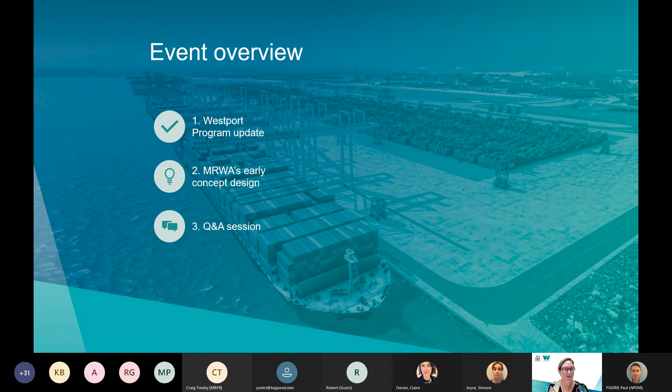Thanks very much, Miranda, and thanks everyone for joining us for this evening's session. Can I also just say, particularly to the landowners that have joined us this evening, that I appreciate the announcement the other day may have caused some concern and surprise, and I recognise that would be a stressful situation for you. I really hope today we can go through some of the background information around Westport as to why this decision has been made.

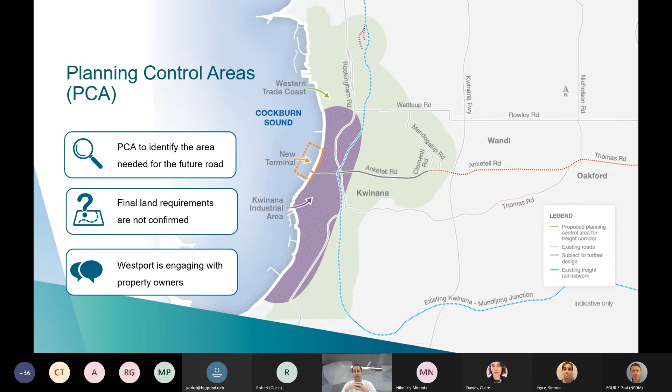So the planning control areas are out there while we finalise the land, and this allows us to speak and engage with property owners and other people interested in this space.

The next step for this development: the announcement was made a couple of weeks ago in terms of the early road concept design shared with the community of landowners. This wasn't released prior to that announcement at all. We worked really quickly to try and get something done as soon as possible and get it out to the community rather than hold on to it, and we've got that out as soon as we possibly can.

After consultation through this process, Miranda is speaking to many of you and others. After we've had the opportunity to talk to you about this, the road design, and what the implications and opportunities are for you, in the middle of 2022 is when we expect the planning control areas to be implemented, and that's when we'll actually see decisions made that limit the ability to change development in those locations.

Between mid-2022 and the end of 2023 is the time we'll be designing and refining the design. This will follow community engagement, but also substantial work yet to be done around how many trucks and how big the road actually needs to be, depending on how many containers travel by road versus rail, and how big the port needs to be. It will also be heavily influenced by environmental and cultural studies, which haven't been undertaken at this point.

We have some initial environmental studies which allowed us to position the road, but there'll be more detailed work done as the design progresses, and obviously the cultural studies as well. We have a cultural advisory group of elders and leaders from the area who were elected by Aboriginal people in this area, and they've been very clear with us about the need to do proper cultural studies along the corridor to identify any areas we might need to avoid or accommodate.

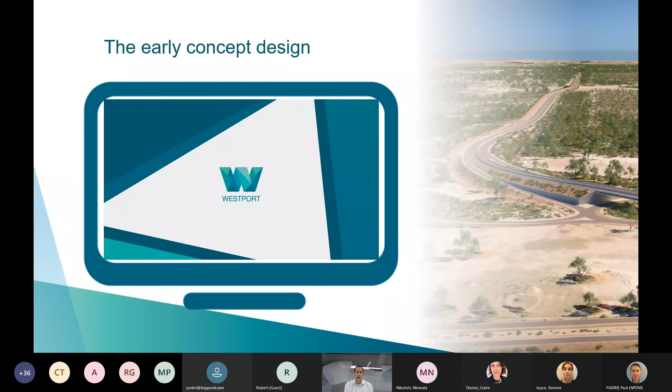What I'm going to do now is ask Simone to run a visualization of the road, and then after that, Paul Fourie from Main Roads, who's been the lead on the design and modelling of this road, is going to take you through the design in somewhat detail, and then we'll come back to questions. Thanks, Simone.

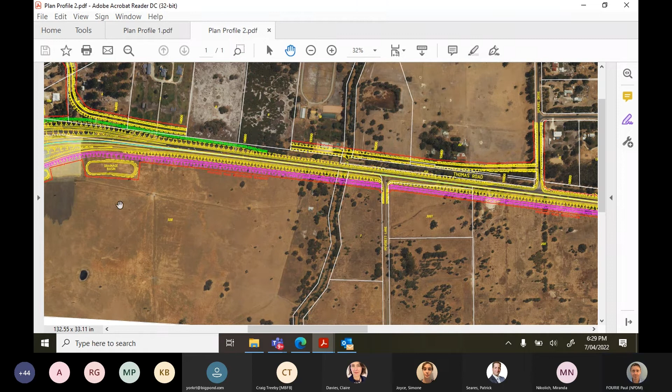Moving further west. Now this was quite a complex location because we've got Nicholson Road to the north and Nicholson Road to the south. We also have Thomas Road to the east, Anketell Road to the west, and then Thomas Road to the south here. So the best way of dealing with this, because we want to provide free flow movement for freight traffic and general traffic through these intersections.

What we've provided here is two grade separated roundabouts. This is a roundabout, a very large roundabout, with a diameter of around 70 meters, at grade. And that's a roundabout at grade as well. The freight route runs free flow over these two roundabouts.

And then the roundabouts with these little service roads on either side provide for all movements. So you can come along the freight route, take the off ramp, go through the roundabout, pass under the freight route, and then travel to the north, and so forth. All movements are allowed for at this grade separation, but it is quite complex.

Again, these round areas here are future drainage basins to catch all the flow, all the runoff from this future grade separation. And you can see here our principal shared path running on the southern side of the road. Thomas Road in future will be upgraded to a 4-lane divided standard, continuing to the south here.

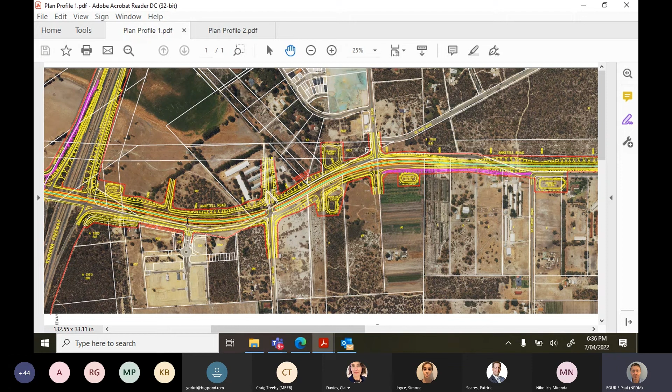So this is fairly complex, and unfortunately, as a result, the footprint is fairly large through this area. But we had to provide access as per the structure plans, which we've done, while also continuing to provide a free flow freight route for all the container trucks and other freight traffic. So these will be two freight-only lanes for container trucks from the future port, but also for other heavy vehicles. So moving further to the west.

In order to achieve that, we have to provide a 3-level grade separation at this location. So we have Kwinana Freeway and the rail at the lower level. Then we have Anketell Road, westbound, which will use the existing bridge, and eastbound, which will use a new bridge constructed to the north at the next level, at the existing Anketell Road level. Then we'll have the freight route, two lanes per direction, running at a third level over here, which allows vehicles coming off Kwinana Freeway to turn right on Anketell Road. They'd only be able to do that if this were at a third level, because they will turn right underneath this freight route. So maybe I can just pan down here.

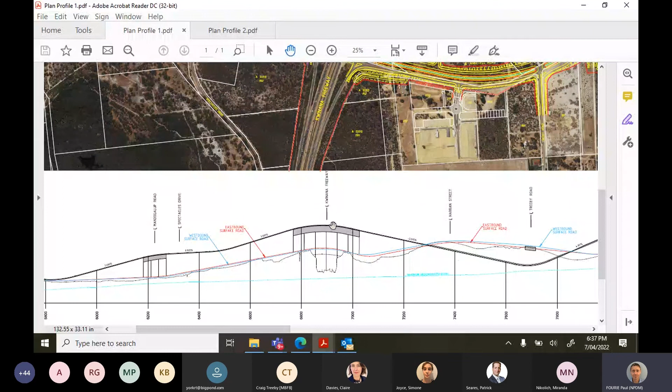There's a profile that shows this as well, and when you ask questions, I can show this as well. That's existing Kwinana Freeway and the rail at that level. This is existing Anketell Road at that level, and then the freight route passes under Treeby Road and then climbs and passes over Kwinana Freeway at a third level, and then it continues. It passes over Mandogalup Road and then back down to ground level at this location.

That arrangement continues with the freight route in the central median, two two-lane surface roads, one westbound and one eastbound, through the Mandogalup intersection. This is also grade separated, providing all movements into Mandogalup, but allowing the freight traffic from the port and all other heavy vehicles to proceed free flow through this area, and then rejoining the 4-lane divided freight route at this location.

What we haven't shown here, unfortunately, I'm sorry, is the principal shared path, but that continues through here. So we'll have shared paths on both sides because this is an urban area, continuing on the northern side through this area.

There is very, very slight impact to the Spectacles. In fact, there was impact because there's an existing planning control area over this area, so there would have been impact anyway. We're just working on the design to try to minimize that impact as much as possible.

As Patrick has said, this is really a very preliminary design. The purpose of this session is just to inform you exactly what this design looks like, and we welcome all your comment. I'll hand over to Miranda now, and then she'll start the Q&A session. We welcome all your comment, and we'll try to incorporate your comment to the best of our ability where possible into the design in future.

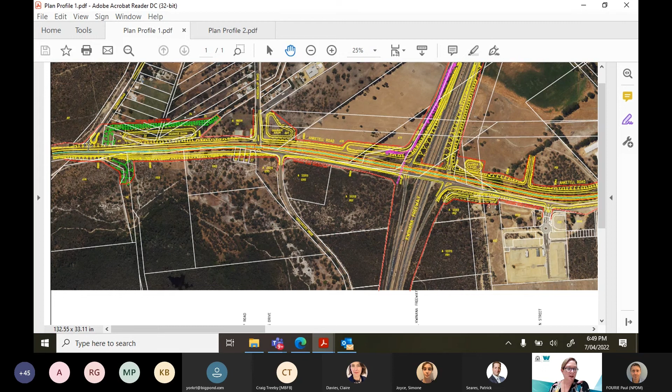Thanks Paul, and I think this is another one for you. I know we've touched on the Line Road intersection location, but there's a query here as to how noise will be mitigated overall, through this area here, through the urban area, I assume.

Look, that is something we've looked at a high level. We have done some high-level transport modelling using our main roads regional operations model, which is a strategic demand model covering the whole metropolitan area. So we have a reasonable idea of traffic volumes along the route, but we have just started more detailed mesoscopic and microsimulation modelling, which will give us more detail on traffic volumes. That work will be complete later this year, and then that will inform any noise assessments. The noise assessments will then identify what noise mitigation will be required for this section through this urban area.

Thank you. Before you go away, I think there's another one: will this road upgrade be able to handle projected traffic volumes, both freight to Westport as well as car traffic, for the next 30 or more years?

Thomas Road, east of Nicholson, probably carries around 20,000 vehicles a day. Anketell Road to the west, the volumes drop off significantly, and then volumes pick up west of the freeway again, I think to around 15,000 vehicles a day.

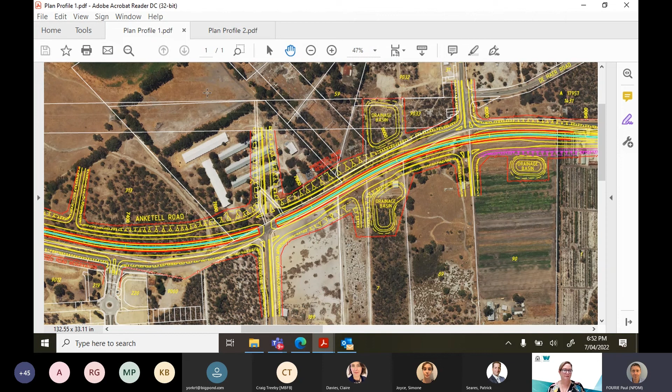Our business is a query around our business possibly going to be affected due to the final stretch of the port entry. When is Westport considering contacting affected businesses in this area?

Thanks, Shatan, apologies if I got the name wrong. Look, we've reached out to most of the businesses, or the landlords of where we expect that last stretch to be going, and having a conversation with them. So if we've missed you, if I could get you to just contact Miranda after this session, then we'll reach out to you and be in touch as soon as possible. But as I said, the final design at that end still has a bit of work to do before we get too far down that track.

Great, thank you, Patrick, and thanks for the great question. This is a bushfire prone area. Left in and left turn out lanes limit options for people fleeing a potential bushfire. How will this be mitigated, please, Paul?

Yeah, so look, that is correct, but we believe that at this location, if there's an emergency, you'd have traffic management on site, and you'd be able to travel in the wrong direction on the road. So even though it's left in, left out, let's just look here. So here we have a left in, left out. But I think that if there's a fire emergency, you'd have traffic management on site and emergency services, and you'd be able to do the right out and drive through to the Thomas Road access.

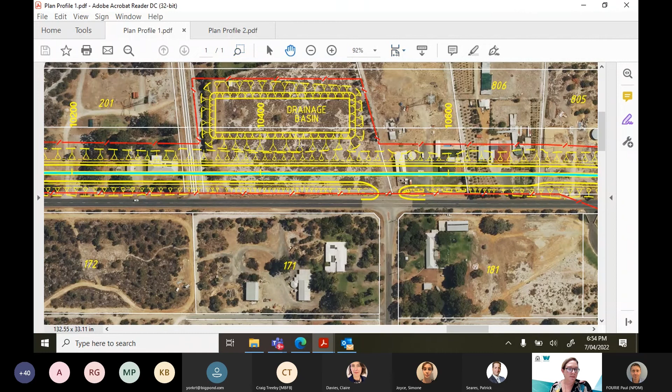Thanks very much, that makes sense. Just a question on whether the concept plan PDFs shown here can be emailed. The format of them at the moment is fairly difficult to email depending on mailbox sizes and legibility, but we're working on having some plans available to share in a more shareable format. So thanks again.

What about the noise mitigation between Kargotich Road and Nicholson Roads for the special rural properties on the north side of the road, Paul? How will that be considered? So these properties over here, probably.

Look, I think it's probably the same answer that I had previously, that we are doing more detailed transport modelling, and that modelling will then feed into noise modelling, which we want to have done probably by the end of this year or early next year, and then that will indicate what would be required in terms of noise protection along this area here. Look, it will probably be noise walls or noise bunds. Yes. Thanks, Paul, for clarifying that.

And also around the consideration of alternate alignments, Paul, has Thomas Road west of Kwinana Freeway to Rockingham been considered, and also Thomas Road east of the freeway directly through to Nicholson Road, rather than altering Anketell Road as such? There are already 4 lanes west of the freeway, so with a few intersection modifications that would fit the criteria. Running east of the freeway to Thomas Road, Nicholson Road also would require less alteration, with 3 or 4 quieter intersections than those along Anketell Road. And there's just a comment that I understand the western connection to the port may be the reason for this. However, the land west of Motorplex could be utilised for this connection.

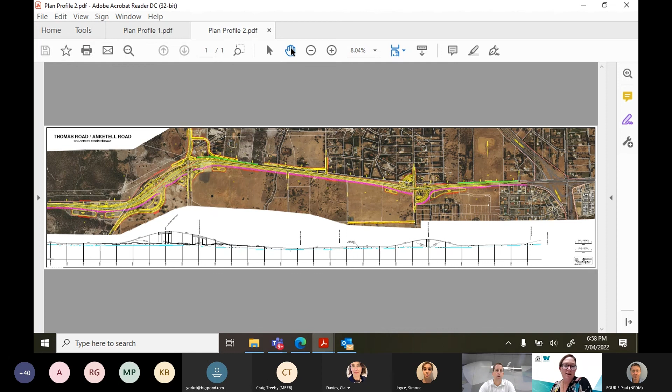I wonder whether Matt wants to answer that. Matt's not online at the moment. We might have to take that, or Patrick. Matt isn't here, but I'll just answer that.

One of the things that Main Roads and Paul have done here is try to find a really good balance for the corridor in terms of what's been developed. Yes, there are some impacts, unfortunately, on flora and fauna, but that has been balanced with trying to avoid the impact on many properties and people. So there is a bit of a balance.

Obviously, the surveys that Paul was referring to have been done, and more surveys will be done to make sure we manage properly the fringe effects of the new corridor. And there's a lot of work going on in the background.

If we are going to have the most sustainable port in Australia, that also includes the logistics links. So there's a lot of work going on in how we can enhance vegetation in this area, or buy additional offsets to reconnect large blocks of land, or otherwise accommodate and deal with any impacts that we do have.

I think there's a really balanced solution that's been arrived at between important environments and also people's properties. But there's still work to go in that space, as we've said.

And obviously the drainage design would also be environmentally sensitive, with bioretention etc., to make sure that spills don't get out of the road reserve.